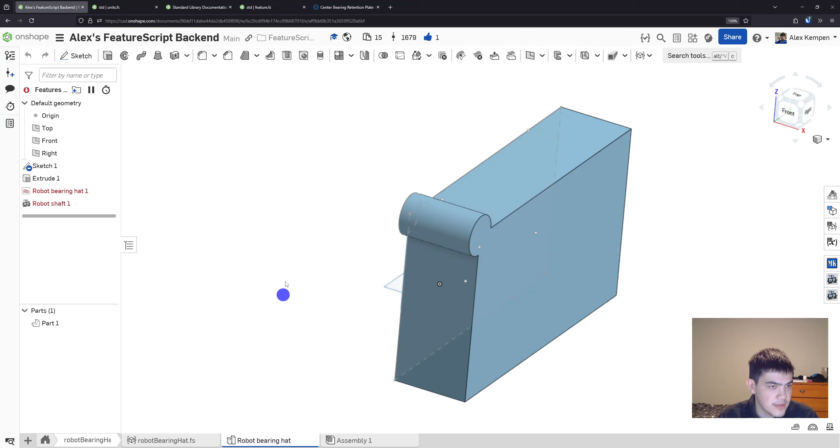So the first thing then is, in terms of selection style, external thread is probably a reasonable basis actually. Cylinder edges, yeah, so this is actually very similar. And I might actually steal that, to be honest. Let's go find that. Oops, wrong search location. External thread.

Okay, here's the feature, and here's their selection. So I'll go ahead and steal this.

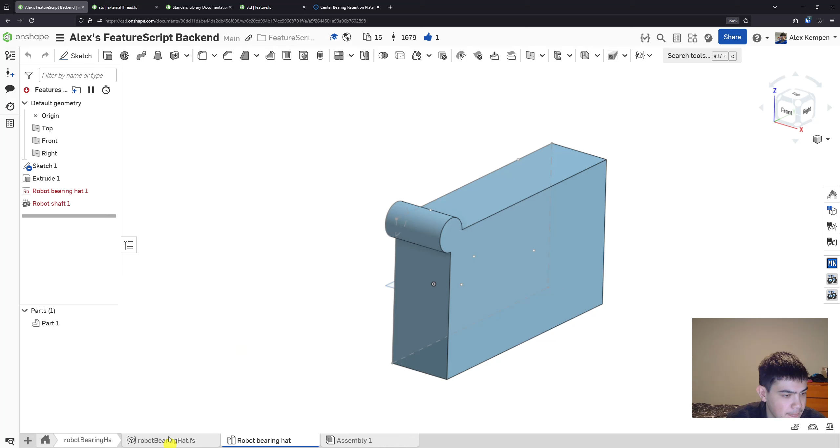So again, I'm just doing the same thing I did yesterday, although this time, going off what I was just talking about, I don't think it has to be unconfigurable. They have a bunch of things on here: edge topology, two-sided no, modifiable entity yes. Okay, this all seems reasonable to me.

So it's a circle, it's an arc. Oh, they also allow arcs. I don't want arcs on here, I think, because it shouldn't. I want a full bearing hole, and then I'm going to limit this to one.

Using this, if you're wondering what these parameters are, if you search FeatureScript documentation, you should end up on this page, and then the first link. There's a couple different things: there's tutorials you can look through, and then there's the standard library source, which is this document std. That's the source code, and it's pretty hard to parse if you're not pretty familiar with code in general.

But it can be useful for stealing parameters like I've been doing. Otherwise, you also have the standard library documentation, which is the documentation for all of the public functions, their parameters and return values and whatnot, which is pretty handy.

There's also this handy section, there's a bunch of other stuff in here for syntax. This is pretty verbose, so if you're not familiar with another programming language, it's not going to make a ton of sense, because it focuses a lot on the difference between FeatureScript and other languages.

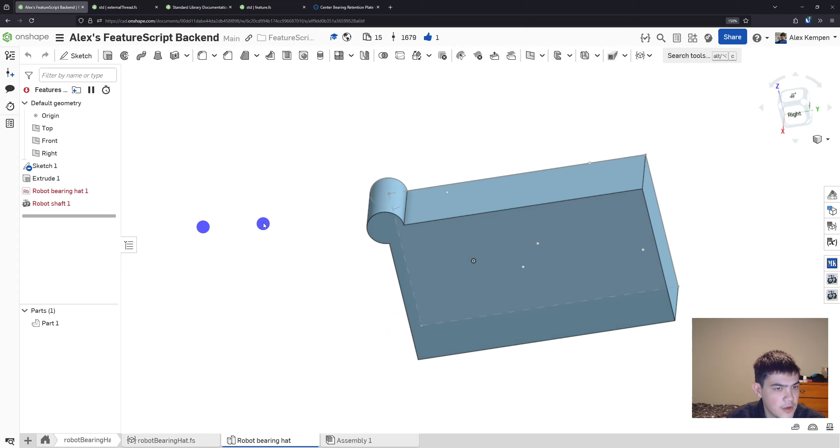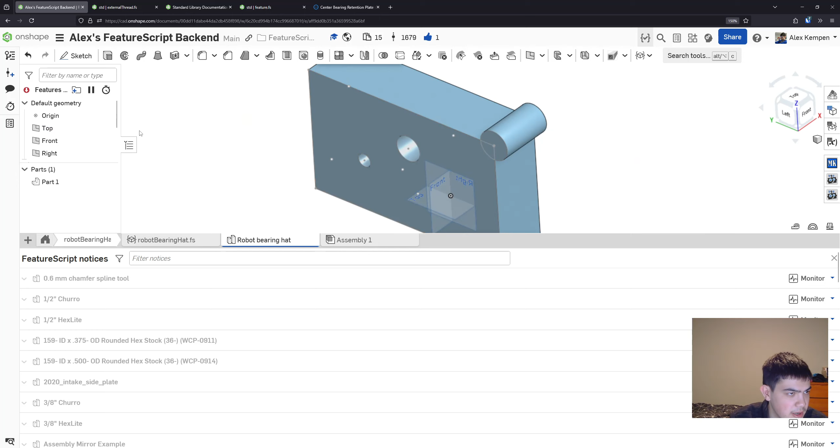So now I need a bearing hole, so we'll just make one real quick. Okay, yep. So now when I do my robot bearing hat feature, it asks me to select an edge to place my hat, and we can see here we are getting that part. I think it's going to be pretty hard to find one that doesn't have... oh, here's an easy way actually—if I just have a cylinder and extrude my entire sketch. So here's an example of a cylinder that I can select.

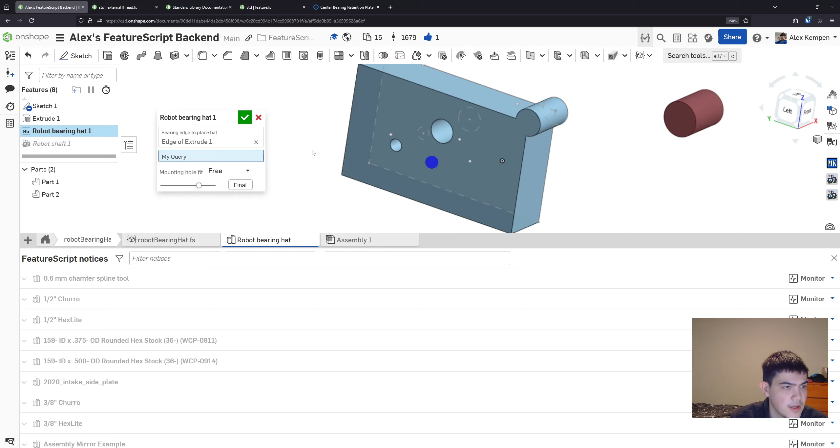So I'll probably want to do some querying to handle this case as well, so I'm not... because that's kind of goofy, of course, but you get the idea. Actually, I do wonder if there is an easy way to detect those. But yeah, so this works—we can see our debug was highlighting our entities correctly.

And I'm not going to worry—I guess you'll just have to take my word for it on the error handling, because this is a pretty niche error to find anyway, since we have so many filters on here: between circle, no sketches, and edge topology, no construction. I think that should handle most of our cases, but it's here if anyone ever goes crazy or something.

Okay, so we like that. So now we want to know if it's a hole face. And so when we were scrolling through here earlier, we did notice there were some functions for—you can check if it's like an OP hole. Of course, if they're extruding a circle, you're probably not going to have those parameters.

If I keep scrolling here, qAdjacent—so you could guarantee it's adjacent to a cylinder. That still wouldn't handle our big case though. Connected faces, loop edges, loop bounded faces—could try to use that to get the whole face. qHoleFaces, interesting—returns all faces of the hole. Let's give that a shot, actually.

Oh, that requires a face inside the hole, which we don't necessarily have, so that probably won't help. Although you could use Q adjacent, but then you have two faces you have to figure out. Yeah, and one of them you could require to be a cylinder, but that still doesn't solve your problem.

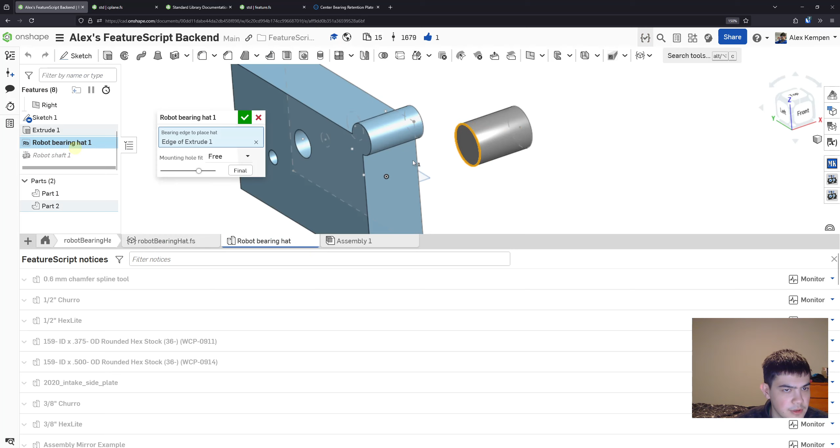Right, so I click my bearing and we scroll down and we are in fact seeing a circle, right? And so one thing that's important about this, right, circle.z-axis, oh, it has a coord system, coord system.z-axis, right?

So if we look at the documentation for a circle, we see it's a map. It has two key value pairs, one is a coord system and one is a radius. So we know how big it is, and we know where it is, and then we know the circle lies in the xy plane of this coordinate system, and the origin of its parameterization is the x-axis. Cool. So the thing I'm curious about is where is the z-axis on here, right?

So a coord system, of course, if you look at this, is just another map. And it has an origin, an x-axis, and a z-axis, right? And we can convert between a coord system and a plane pretty easily.

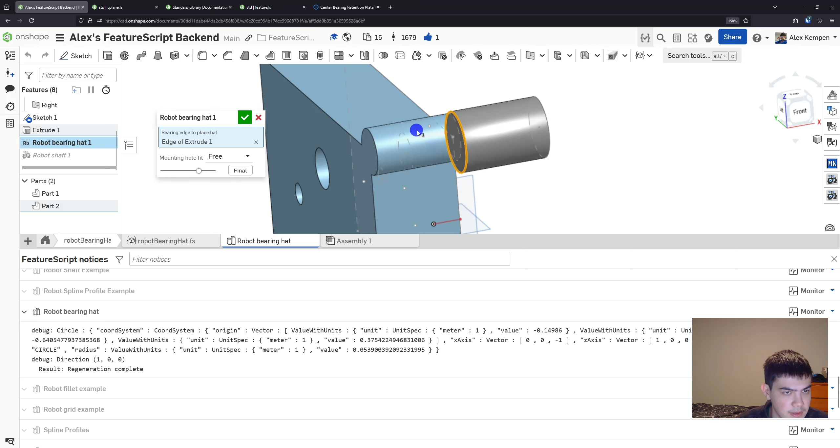So I'm just going to go ahead and print that out and see which way it's pointing. So you can see here, because it's just a vector, it's just on the origin, because it doesn't actually have a representation. It's just a direction. It doesn't actually, or vectors are unitless, so it's not actually from that point. You need a line or an axis to have that. But we can see, so here, this circle, it's facing that way.

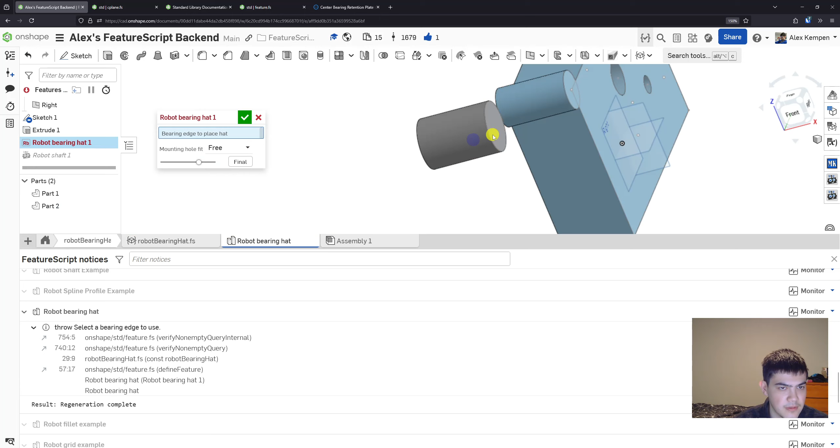And if we flip this around, it's still facing the same way. So that's good to know. And here it's like that, and there it's like that. So it's arbitrary for the direction of a hole. It looks like probably the direction of the extrude, or opposite, I guess.

Okay, so that's good to know, because that means we're not quite out of the woods yet, because we do need to know which direction the hole is in, so we can extrude the right way. We don't necessarily have to figure that out, we could just extrude both ways. But there are versions of this where, if you were to actually model the hat, you do want to know that direction, and so being able to figure it out would be helpful.

Although I do wonder, I don't think this is something that you're going to be able to figure out reliably. You could do the qAdjacent thing, get the whole face, get the planar face, or the bounding face, and then try to run evPlane on that to get the face, and figure out the direction from that. But the bearing hole isn't guaranteed to lie on a planar face. So evPlane could do something goofy.

And so generally when you get into heuristics territory, it's usually better not to try implementing those in the feature body. And if you think you can come up with a reasonably good approximation that should work most of the time, maybe that's something better for editing logic, where when a bearing hole is first selected, you take a best guess using some code to try and set the direction automatically.

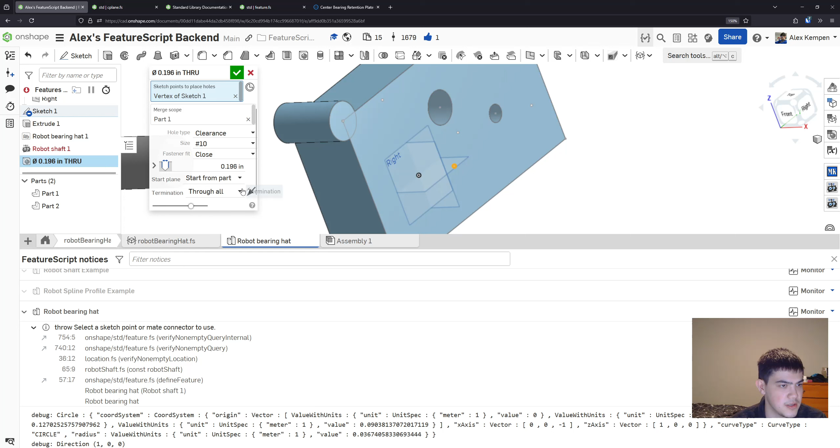But yeah, so we know from the standard library, this is a pretty common thing. For example, the hole feature, anytime you're adding a hole, it does its best to set the direction for you, but you can always change it yourself. So this sort of pattern of being able to change the direction, I think is probably the way to go here.

And actually, I think, so if we think about the rotation feature, actually not quite, I don't love that. If we think about positioning a mate connector, so if I wanted to position a mate connector over this hole, right?

Yeah, so it always knows the outer direction, which is interesting, actually.

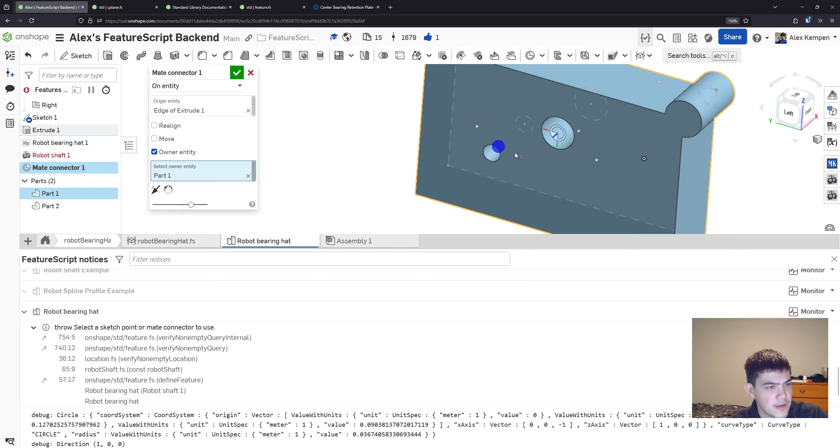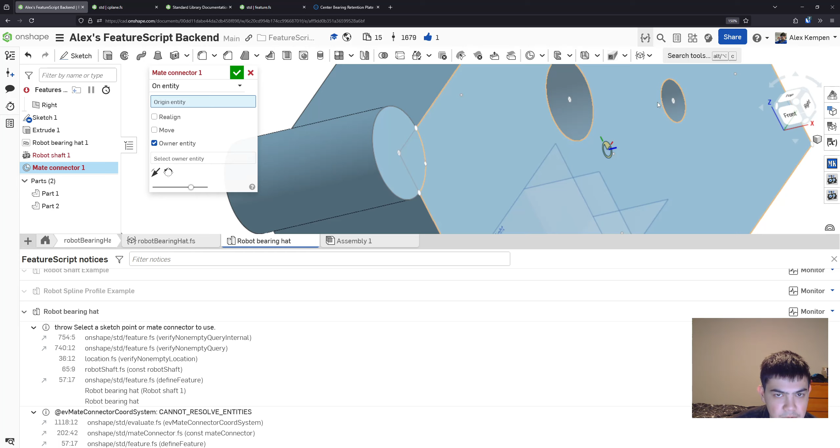But are there cases where that could be wrong? I guess so, right? Well, how does that work? Actually, now I'm curious. Because I know for mate connectors and assemblies, if you grab the hole, or the hole face, and you have the start, middle, and end, this is always one direction. We actually were seeing that earlier with the edge. But this edge here, on the face, is always facing outwards. I guess it's because it's implicitly from the outer face and not the hole face. But how does that work then? That's interesting. I guess one thing at a time, right?

So one thing I do like about this is you have your flip and you have your reorient, so you can turn it 90 and rotate it around. So this UI right here I actually do like a lot. So I'm probably going to steal that.

So let's go open that up. Mate connector. Yep. So this is the mate connector feature.

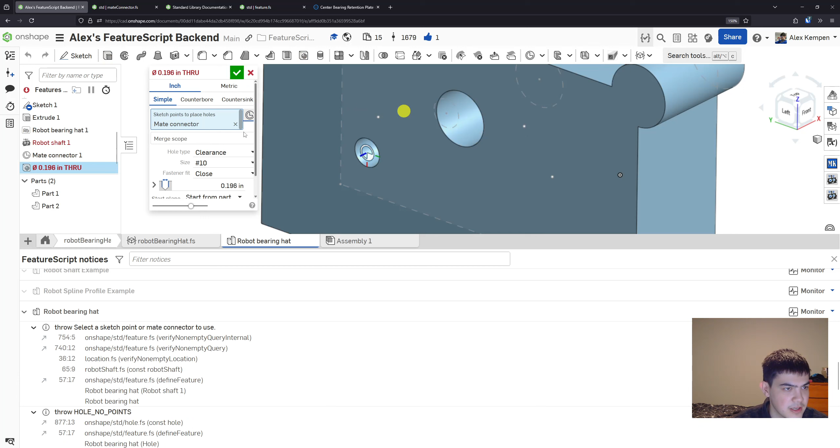And I believe this is actually also used in assemblies, right? So there's the mate connector feature as well. But you also get a variant of this when you click this button, you select a mate connector, right? And when you click this to edit, this is also the mate connector feature brought in line. And same thing in the assembly. Although the assembly doesn't quite run FeatureScript, so I'm not actually 100% sure how that works. But the parameter names and things are all the same underneath the hood. So yeah. Anyway.

Yep, so if we look at the code, right, we see origin type, origin entity, right? There's some hidden parameters in here for inference type. That might be the secret to how they're able to get the direction, actually. Part origin point centroid. Respect to an entity. Face normal. Along the normal of the plane which the edge lies on, or the center of a sphere with the world coordinate system. Aha, so this is probably how they're doing it, right? Z-axis along the normal of the plane which the edge lies on, right? So that's the face version, right?

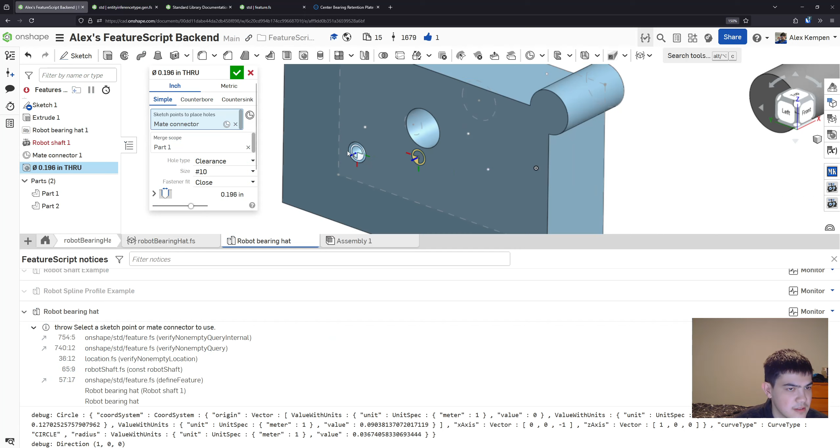Anyway, that's beyond the scope of what we're doing right now. But that is an inference type, so I think that is something that's kind of implied or calculated via editing logic rather than something that is necessarily 100% reliable. Inference type. Now I'm curious. We are falling down a rabbit hole, which I accept.

It does take an inference type. Where is this used though? Oh, is it just passed to opMateConnector? Yeah. Oh, no. opMateConnector. Transform result if necessary. All parts, lots of query logic, lots of thinking, lots of finding owner bodies. That returns owner bodies. Let's see, this function ends here. It might just be an internal thing. I'm actually not sure. There might be some internal wrapper shenanigans going on with this, or maybe I'm just missing it. I'm surprised it's not... Oh, no, here.

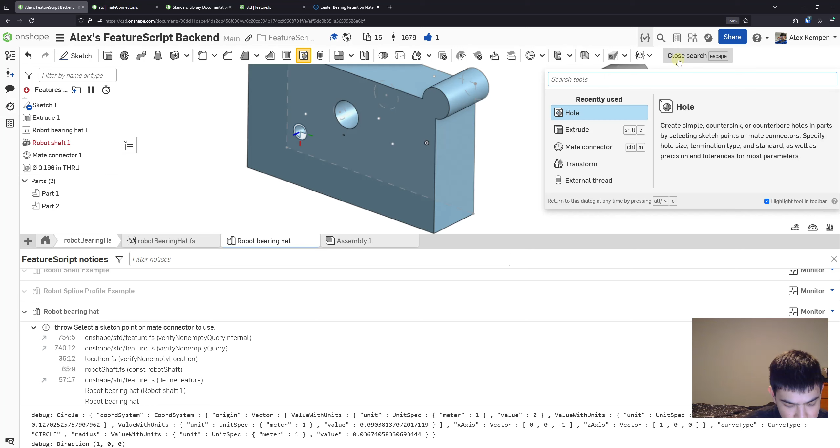The part I want is here. Wait, is that what I want? I think I want these guys? Wait, hold on. Sorry, getting sidetracked again. Mate connector. That's there. Okay. Mate connector. I want flip primary axis, reorient secondary axis. Flip. Okay, yep. So these guys. So we'll do that. So just grab those two guys here and slap them down here probably, right? And then we need a mate connector axis type. Let's see, mate connector axis type. Aha, yep. So here I can steal this import.

So if I copy paste this, and then, Windows V? Nope, wrong Windows key. Windows V, yep. Didn't copy. Oh, that's so sad. I swear, what is it copying? Okay. I copy paste, nope, okay, it didn't work.

Mate connector axis type gen. Type.gen.fs, right? And because I need the enum, I'm gonna have to export it because enums have to be exported. But that should give me that. And we can see it's no longer throwing the error, so it's happy, which we like. So cool, we're happy with that.

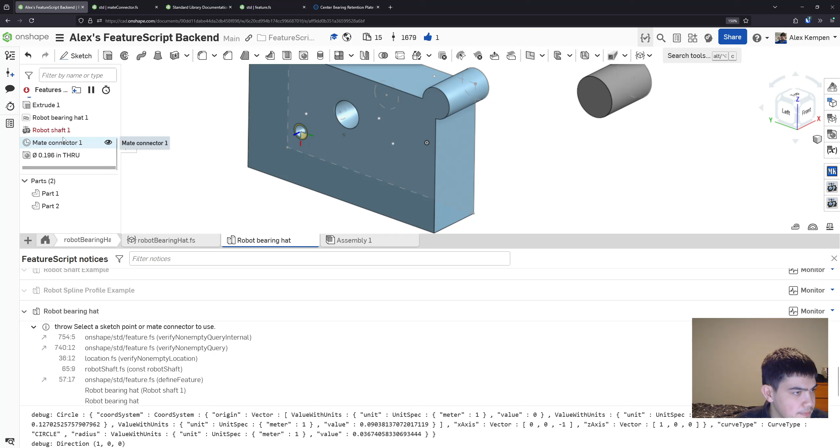Okay, so we have our flip and we have our reorient secondary axis, right? And then we can also specify rotation angle, which is good. And it defaults to 0, which we like as well, right? Cool, so we're happy with that. I guess rotation should probably be like revolve, kind of. Revolve angle, maybe like transform.

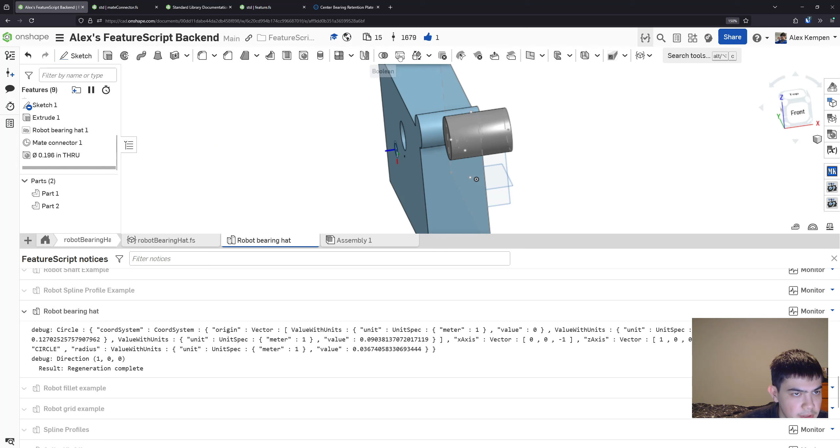Angle, and then you have a flip on it. That makes sense. Okay, so I actually probably want to do something like this. And what did that say? Rotation angle? That seems reasonable. Actually, probably just angle is fine, I think. So let's go steal, what was that from? Transform? Let's go steal that. Right.

And you could, of course, make your own UI. You don't have to always. I think it's actually transform copy is the actual feature. Transform is like the geometrical transforms you use in Onshape, like the math, a 4x4 matrix of numbers that defines an arbitrary transform in 3D coordinate space. So transform copy is the actual feature because it transforms and copies, and just because transform was obviously taken.

Because I think for programmers, the math version is a little bit more important than the feature version. Obviously to users you don't care about the math, but to us programmers it's near and dear to our hearts. So, okay, here's the UI, right? So we see the different modes, mate connector, rotation, here we go. So here's the angle, and here's the opposite direction. This is actually just the bog standard opposite direction Boolean they use everywhere. So I'll grab that.

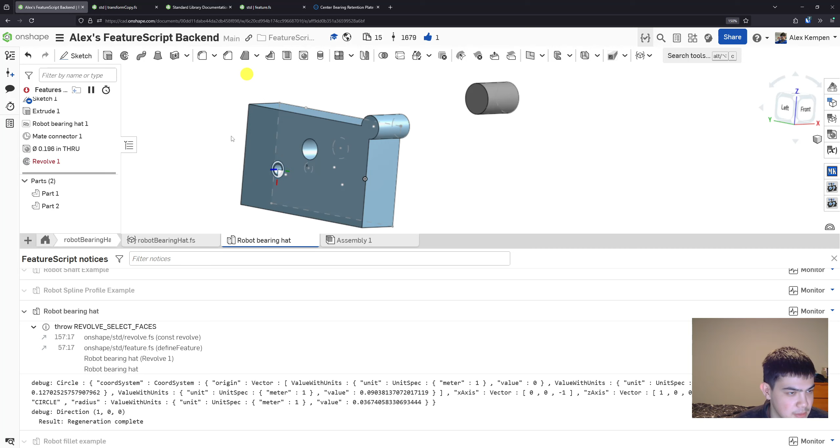And the reason why, it sounds a little counterintuitive, but that's for features like revolve, where a 0-degree revolve doesn't make sense. It's actually not allowed. Oh, it actually is allowed. That's funny. But it doesn't make as much sense as it might otherwise. So instead, there's a 0 default specifically. But yeah, so that's our angle, and I'll probably name it rotation, I think rotation makes sense. Okay, and that's flip primary, so it doesn't conflict with opposite direction, which is good. So now our UI looks like this. Cool.

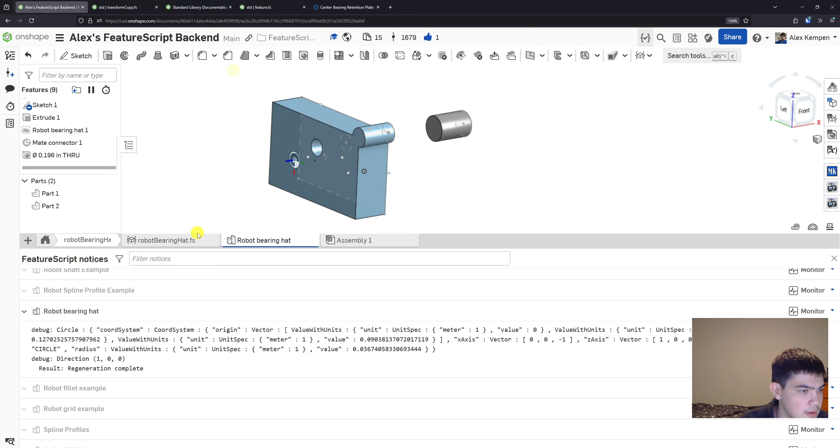And then, do I want an angle reference? Yes. So I'm also going to add an angle reference query, right? And this is not really something you see in Onshape, so I'm going to have to home grow it. Basically the idea is you can select an angle reference to point towards, and then you can also set the angle on top of that. So very fancy, but I think that's helpful. There's certain edge cases where you want to align with something somewhat arbitrarily, and being able to do that is helpful.

And then for this, I know from experience there's actually some query utils. There's a query enum, I'm forgetting what it's called. Extract direction, I know, is the version. Yeah, so there's this enum here, query filter compound, right? These just compose some helpful ones. And here I think the one most helpful to us is allows direction. Although, let's see, the line is good, that makes sense. Plane also kind of makes sense, because you can use the plane normal. Circle and arc and cylinder do define directions, but it's a little finicky. I can't imagine anybody trying to use that with this.

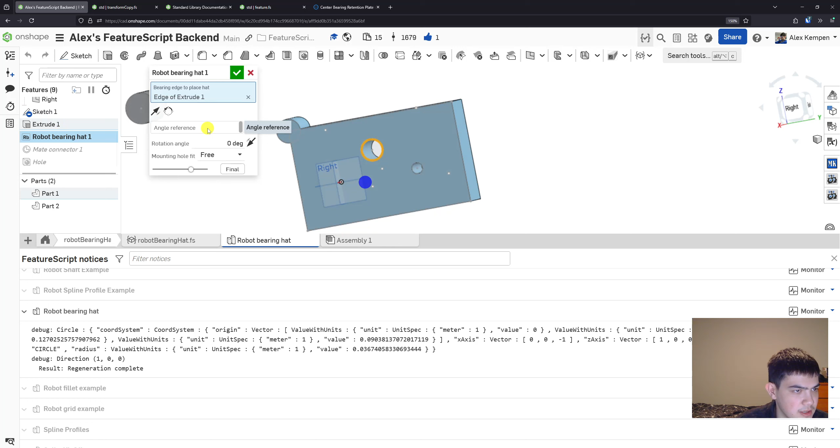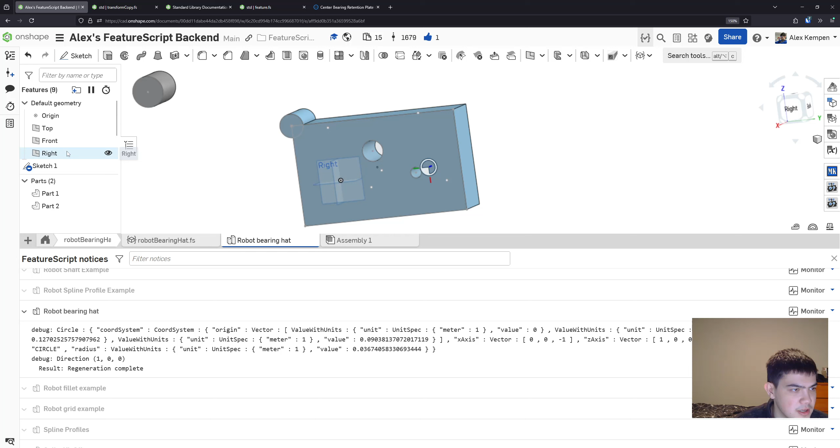Or a mate connector. I don't love the mate connector, actually. So I'm just going to do entity type dot vertex. And do I want that to be an actual vertex? Because vertex allows a lot of things, like I could require it to be modifiable or something, but it just needs to be a 3D point. It really doesn't matter where. So if you want to select a model corner, that's fine. You could orient towards that. So I'm not going to worry about that. And then the line, you just have a direction, so that makes sense.

Okay, cool. So let's do some processing of that now. So I'll start with the angle reference. So first we want to know if it's a vertex or a point, right? Angle reference. Okay, so first, if it's not empty, right? Because if there's nothing, then there's nothing to do here. We can just move on with our lives. But if there is something here, we need to do something. And so here, let's do is point equals is query empty.

And so here I'm going to use qEntityFilter, EntityType.VERTEX, because that's the same filter as above. So this will filter out everything that isn't a vertex. So if this query is not empty, then we know it is a point. So again, after filtering out everything that's not a vertex, if the query is for a vertex, then our query will not be empty, so therefore it is a point. It's a little confusing, but basically whatever query you have in here, if you have this exclamation mark is query empty, this will check that it is of that type.

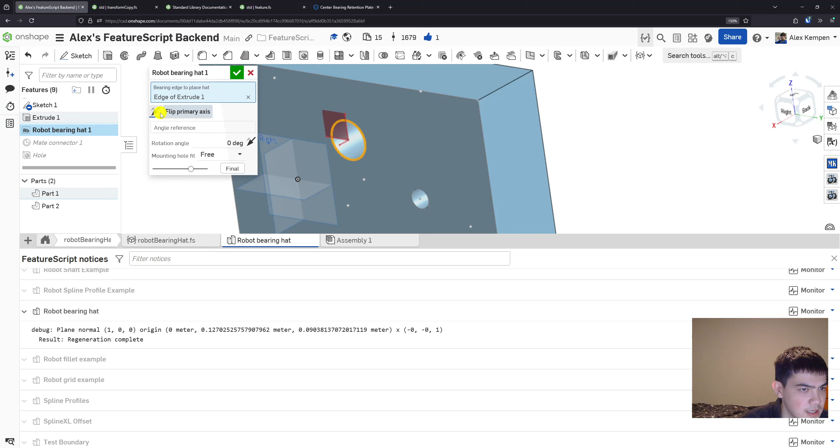Yeah, so we'll debug that and we'll see what we got. So if we do this, you can see I can give it a flip, and I can also give it a rotate. So that does what we want. So we're very happy with that.

The other thing to do is the angle, right? So we'll do const angle equals definition.angle times definition.oppositeDirection question mark -1 colon 1. So exact same thing again, where we take our angle reference, or I guess it's rotation. I'm going to rename it to angle. Angle. Yeah, that seems fine.

Yeah, you take your angle and then you multiply it, and then we will simply apply our transformation, right? And so here I know you can do rotation around. So this makes a transform, right? So this is where you get into some fun units, basically. So I need a line, which I can construct from a plane directly, actually. And then, can I? Pretty sure I could. Is there not an overload?

I guess there's not. So I know, okay, so the first thing I want is rotation around, right? And if you just Control F rotation in here and click through, you'll pretty quickly find this function. So we see it takes a line and an angle. It's rotation around the given line, so we know we need a line. So if I click line, I can see there's a constructor and it takes an origin and a direction.

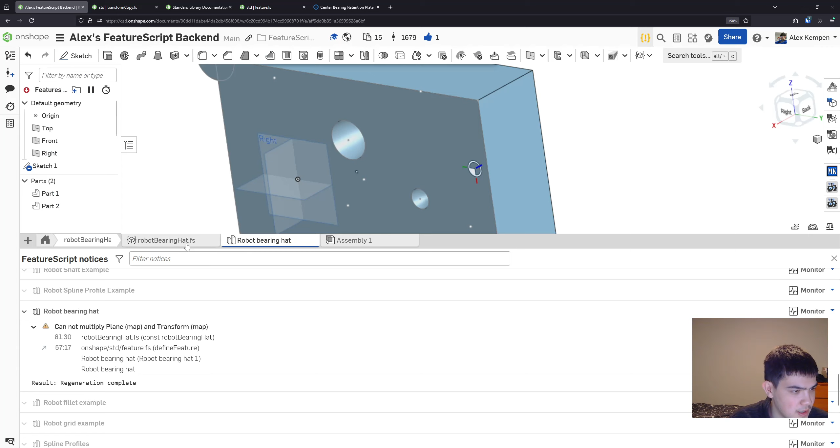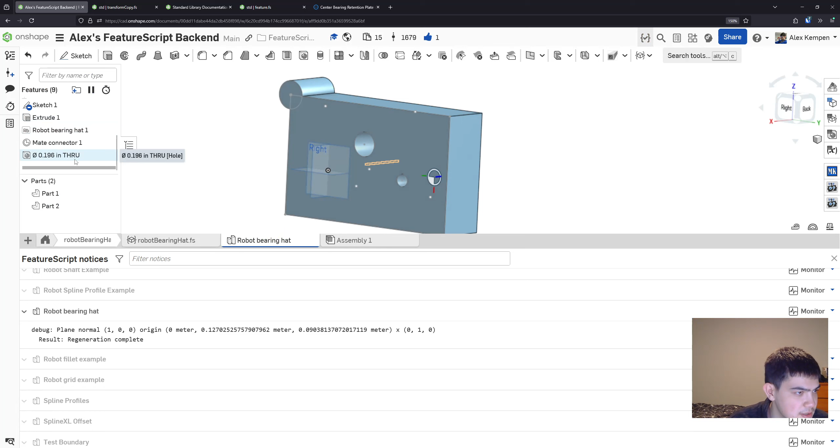Nope, I cannot. It says I won't. Let's try the other way around. Aha, yeah. And then if I debug my plane again, I saw there my error was cannot multiply it, so I just flipped the order of operations. And so now if I enter an angle ref, we can see it does in fact rotate, which is cool. And I can also give it a flip and flip the angle as well. So quite a bit of control there, actually.

And then we just want to do our angle reference now, right? And angle reference would probably apply before the angle. So we put the cart a little bit ahead of the horse as well. But yeah, so here's our plane, here's our angle ref. So now we'll do this. If we have a point, the first thing we're going to want to do is project that point.

Project. And project works in all sorts of things. I know in this case there is an overload that supports planes. You can project lines onto planes, you can project points onto lines, and most importantly for us, you can project points onto planes as well. So we'll project that. Actually, I'll just do it like this. No, I can't. Okay. Yeah, so I'll project it.

And then we want to verify the error case for this, which is if the point is the center of our vertex, there is no angle reference because they're the same point. There's no angle there, which is not good. So the way we will handle that is we will check for it. So you might be tempted to do something like this: equals plane dot origin, then throw your error.

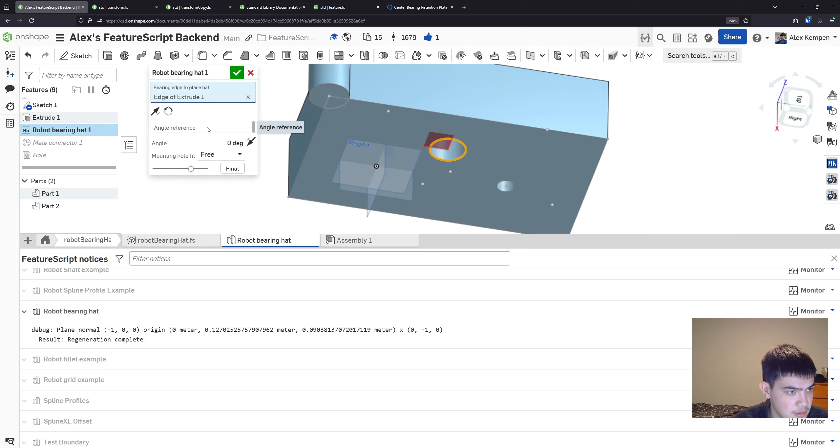So we can go check that. So we got here. Okay, we'll turn off the angle reference because we don't want them stacking. So all we're doing is printing the x property.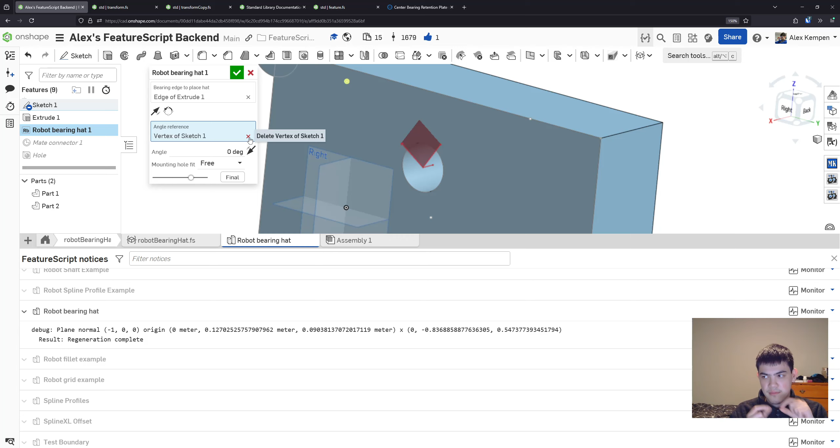A plane is defined by an origin, a normal, and an x. This is like multivariable calculus where they talk about planes and things. If you set the x direction of the plane, the point in the normal, we want the point to be the center of the hole, of course, and we want the normal to be the direction. It's just what makes the most geometrical sense.

So then it makes sense, if you just set the x direction, you will point at that angle reference. If they want like 90 degrees from that, they can do that, because the angle reference does have to come first. But you can logically orient it like that. And so our flip wasn't applying there because there's no point in rotating it if you've already set it, which makes sense.

So I'm going to copy paste this down here. There is kind of a specific order that you have to apply the transforms in, which is fun. And these work on the plane.

Let's just do this: our plane equals plane circle.coordSystem. We'll switch to a plane right here. And then we won't have this. I'll do my plane.x, and then I'll do my plane.normal. Those are just the exact equivalents for coordinate systems versus x-axis. I won't rename that because I'm lazy. And then this will just be plane.origin.

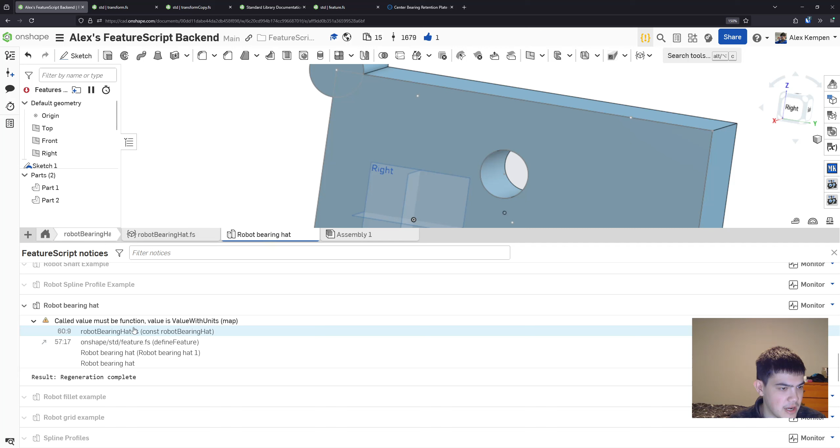So is that right? Should be right. Let's see here. And the fun thing is, if it does happen, we can see Onshape is handling it reasonably well right now. But if I come down here, it's going to say called value must be function, value with units map, right?

Because it's trying to call, because the variable has overwritten the function. You are essentially doing, if this was just my var, you're essentially trying to call my var like a function. And we can see here my var is very clearly not a function, it's 2 times inches. So this is obviously an invalid call, and that's what this is saying. If you're going to call it, it has to be a function because that's the only thing you can call. You can't call a value with units or whatever value.

But the thing is, this error doesn't make it exactly clear what's happening, right? Because you're like, what? Value with units? I'm not trying to call value with units, I'm trying to call a function. What's happening? It's because you've overwritten it.

So here, for example, originally I had this variable named plane, which is the same name as the function. But it doesn't matter as long as it's coming after, because I wasn't using the plane constructor anymore, so I didn't need it. So it doesn't matter if it's shadowed. But since it is being used again down here, it's already in use, so I'm just going to have to rename this to something else, so I'm not overwriting it, so I still have access to that function.

So yeah, a fun little bit of programming lore. It's always a fun issue to encounter.

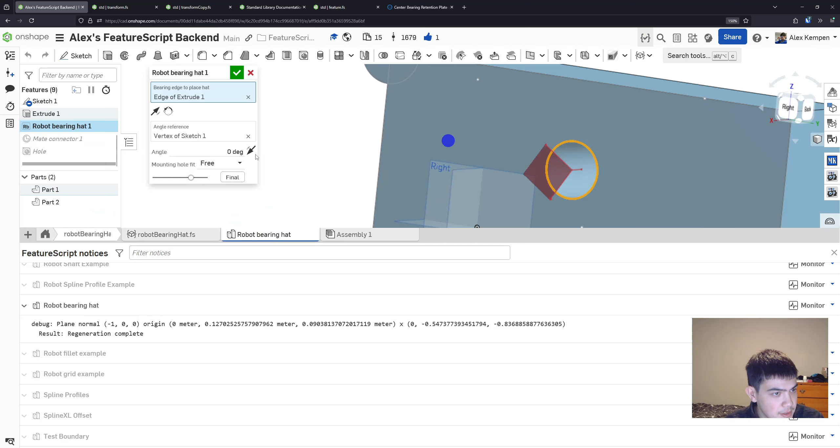So I can set my angle reference, it'll point towards whatever point I specify. Even if my point is not on my point, it'll work. And then if I select my hole, I get an error. You can see the error handling we did. We can see the vertex and the edge are both highlighted in red in the query, and then we have our error message. We can see both parameters are red because they both contribute to the error. Although realistically, the angle reference is probably the more problematic point of the two, but it is them working together, so I think it kind of makes sense to highlight them both.

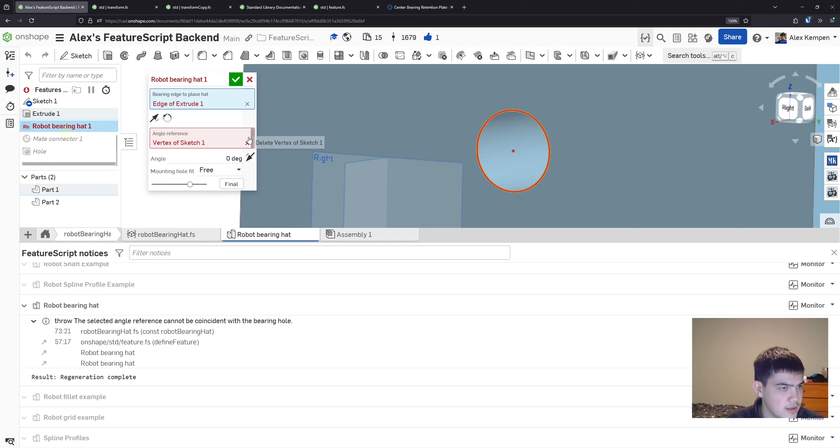So there's that. And then let's verify that this all works correctly. So if this is like this, it's angled. I can still flip it. Yep, and I can spin it around like that. And I can also enter an angle reference. And I can still spin it around, and I can flip it, and I can flip my angle reference too. Perfect, so we're very happy with that.

And then we'll also do the line version as well. So this one gives us a direction, so then we'll do the same thing. And our direction is already a plane, so we can just do circle plane equals direction. And the only thing we have to check here is we need our direction to be...

If the direction is not in our plane, we have a problem. So I'll probably, you could try projecting it, but it's kind of annoying. There's not really a great way to do it because project doesn't work with unitless direction vectors. So instead what I'm probably going to do is, I'm probably just going to require that it's in the circle, so I think we can use

Evaluate intersection. So you can do a line plane intersection. No. Is parallel? Yeah, so we can check if they're parallel. Few parallel planes. Those are queries.

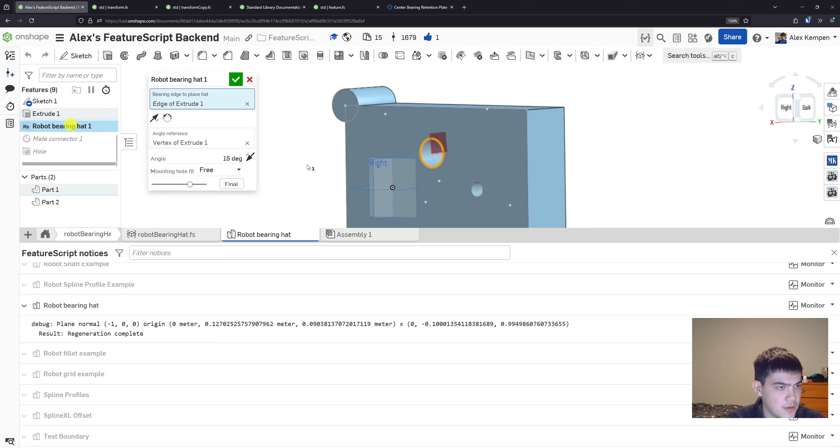So we'll copy paste that, and we'll say the selected angle reference must be perpendicular to the bearing hole. Okay, cool. So here, if I select an angle reference like this, it wants a line. Yeah, that's right, so here it needs to be a line, so I'll just do this.

Because right now it's just a unitless vector, so it's just like an arbitrary direction. So to give it a direction, I will construct it into a line. Or wait, no, I need a vector. Can I just multiply by meter then? Is that right? No, multiply by meter is wrong. I think I do.

Wait. Oh, yeah, sorry, I have to do circle plane. Okay, so I have to make it a vector, so I have to do this. Times meter is just arbitrary - meter is 1 in Onshape because lengths are universal. So this is a fun little bit of vector math, right?

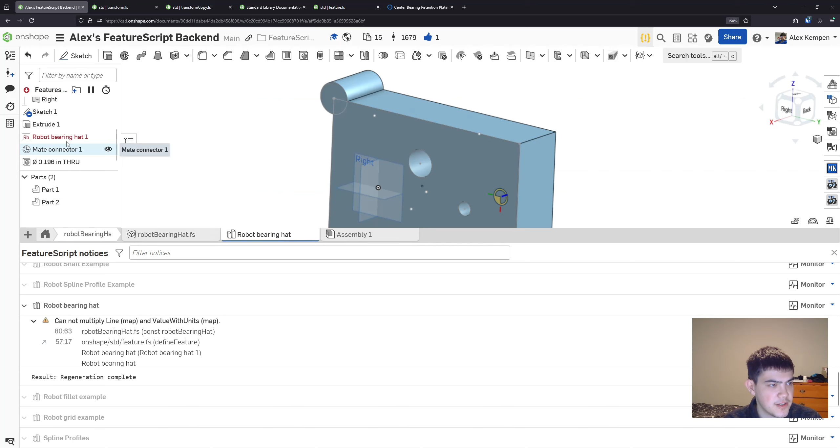Do that just to make it clearer. Okay. So if we debug our - right? So basically the problem is a vector doesn't have, or a direction doesn't have an origin, right? And so, what? Oh, this is a line.

Wait, it's a line? Oh, okay, I think I wanted extract direction. Yeah, okay, and then, oh, this does give a - okay, that's interesting. Angle ref, okay, so that does give a vector actually, so I don't actually have to do that. I was thinking I had a 3D direction, which is not what I want at all, but I have a vector, so we're okay. So I got confused by my units there.

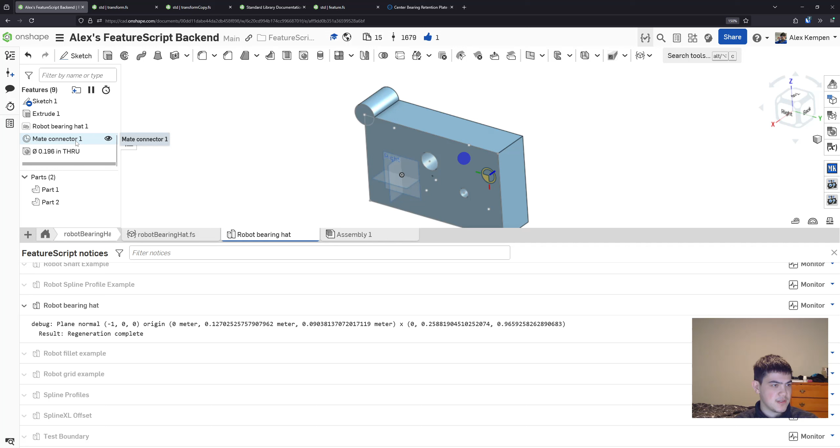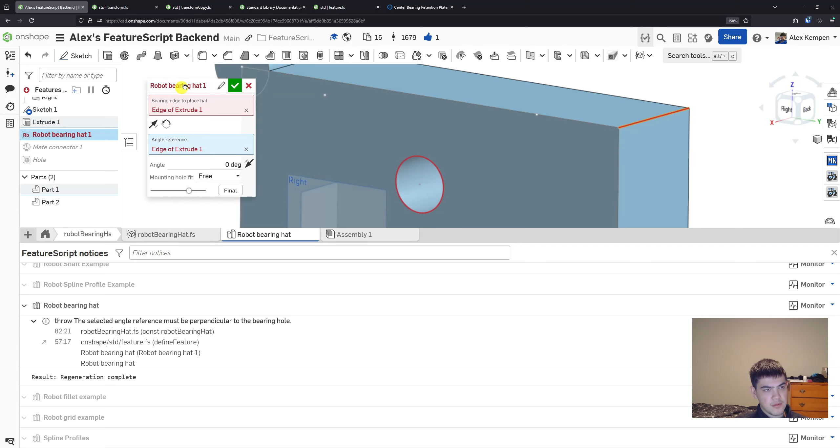And I was using evAxis, which would give me a physical line in space, like an origin and the line, which is handy but not really what I need right now. So if I set my angle reference, it's just giving me that vector, and because it's a vector, as long as it's perpendicular, it's fine. So if we do something like this, it's not perpendicular and we have a problem, and it'll complain, which is good.

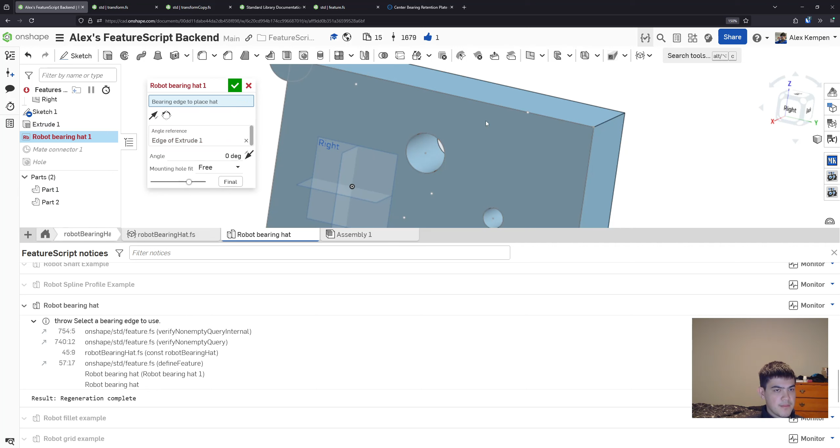Must be perpendicular - I guess it must be parallel technically from the user's perspective, right? Because it should be parallel to the plane. Yeah, okay, ta-da. Great, so yep, so I can do my angle reference like that.

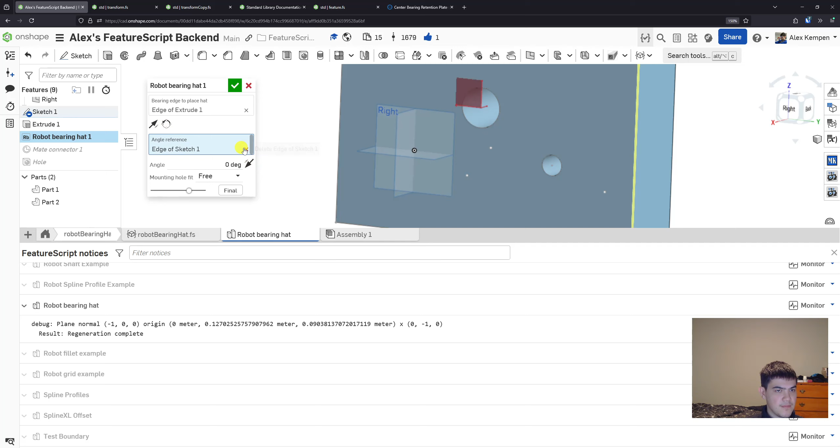Oh, that's the bearing edge. Yeah, so I can change this, and I can also set it like - I guess it just is facing that way like that, and I can flip it, and that all works. So if it was like this, and I select that - oh, I guess it's the same. Wait, really? Oh, okay, yeah, so this works basically. Yeah, it's the default, and that's the same.

Okay, cool. All right, so we're very happy with that. So that's our coordinate system figured out. So we like that. Yeah, so now we have our circle plane, so now we have to actually cut some bearing holes, right?

So this is where the code we wrote yesterday comes in handy again, right? So I'm gonna copy paste that. We just have one plane to operate on today, because we made that decision. I'll comment that - I'll call these my tools, just so that way I can query everything really easily. Circle plane, right, sketch same, and then we need our mounting hole radius code again.

Okay, we'll just do this, do that, yep. I'm not going to make the center hole because we're assuming the user has already cut that for us. And then, yeah, so by carefully manipulating our plane, we've saved ourselves from having to do a bunch of math, because you can see we've been manipulating a plane that was always centered in that coordinate system, right? And so that x direction is always the way we want it, so we can just draw our vectors relative to that.

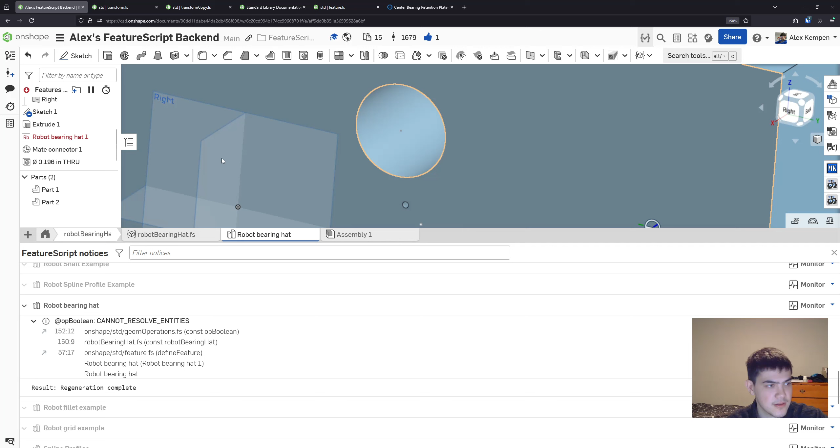So, okay. Ta-da! And then, yeah, so our sketch was too big, right? So if I make this actually a reasonable size bearing hole, still no. Interesting. Okay. Oh yeah, definition.scope. But if we're having an issue with cannot resolve entities, the easiest thing to do is to start debugging your inputs. So there it was definition.scope. You debug that, you see undefined in your console, you realize, oh, there is no definition.scope. I wonder why that is, right?

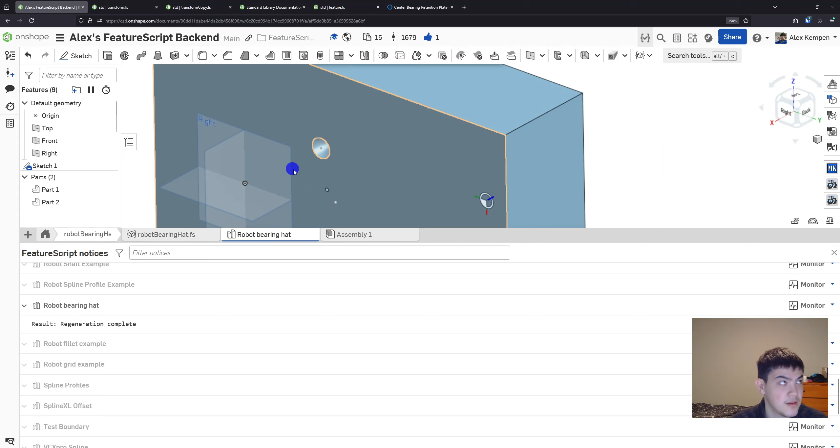You look up here, you realize there's no scope parameter, and you realize that's because you're getting the scope somewhere else. So definition.scope is wrong. And then if there is something there and it looks correct, then you debug the tools and make sure that's correct as well. And then if everything's right, then you write an Onshape support ticket. No, don't do that. Then you think a little bit harder about your life, I guess. But usually there will be something wrong with your input in some way.

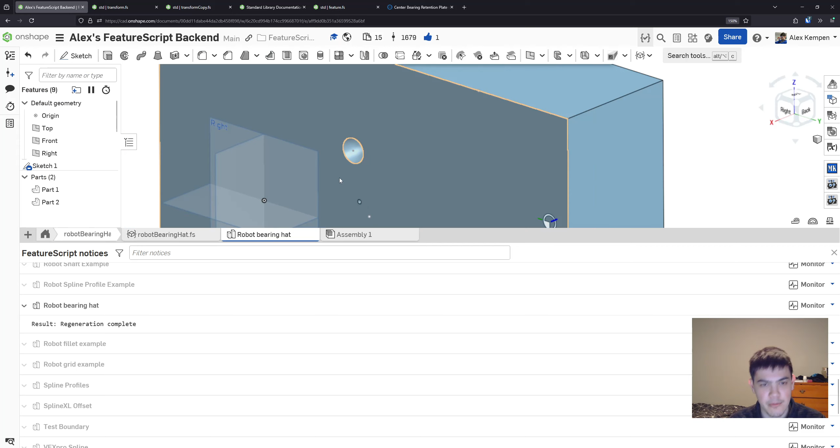If you debug both and they both look right, then maybe I would try to do a simplified example, or verify that the feature works the way you expect it to with a trivial example, like I'm just going to remove a simple box from everything, right? Make sure that works. If that works, then you can kind of work your way up, basic programming debugging, or you can just be like me and just spot the problem immediately. Maybe don't bank on that.

Okay, so we've extruded, and we've booleaned. Okay, cool. So I have the direction the wrong way. And I'm surprised the boolean feature isn't actually failing. That is very interesting. Okay, so I'm going to do something a little bit fancy here. I'm going to use a special feature. What is this? Process foreign data info? What? What is that?

Foreign? Okay. Huh. Not sure what that's about.

Okay, so I'm going to use this fancy function called process new body if needed, right? So what this is... dot remove, right? And then my Boolean scope is my scope. And I do not have a default scope on this guy, so I won't do that. So what this feature does is, actually I could do that. No, I won't, because we're getting the scope. Yeah, so I don't need that.

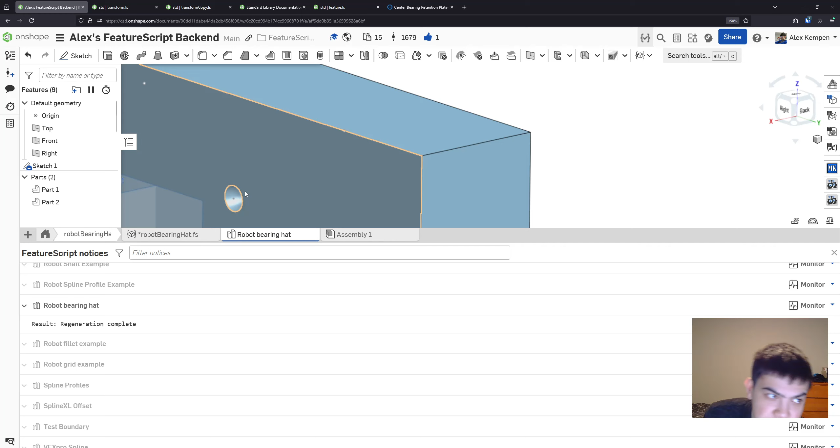So this is for adding a Boolean step to features, right? And so you might say, well, what's a Boolean step? That's simply the idea that a feature will create something, and then you will have the option to Boolean it to something afterwards. So extrude, for example. You can just do a new extrude, but you can also Boolean it onto something, Boolean subtract, Boolean intersect after. Revolve has a Boolean step, right?

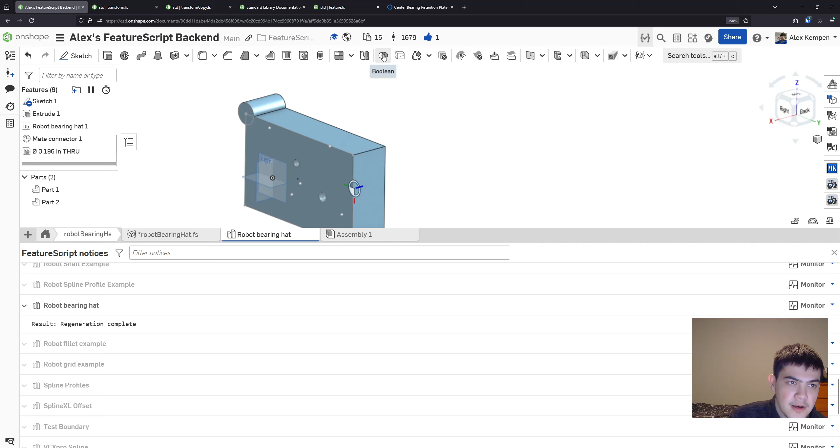You can add, remove, intersect. Other features, mirror has a Boolean step, add, remove, intersect. Pattern has a Boolean step, add, remove, intersect. So it's just that set of options. Anytime you have a Boolean step, you have your new, add, remove, intersect, and then you also have your merge scope as a part of that. And that pattern is so common that it's actually defined in 2 parameters.

So there's a Boolean step type predicate in the Onshape standard library that you just have to export with the correct import, which is defined. The documentation tells you what to do. If you look at it, yeah, you need this import. You just specify whatever version you have. It is just tool.fs. Okay.

So you add the Boolean step type predicate, which is the new, add, remove Boolean, and then you add the Boolean step scope, which is the default scope, and that's your merge with all, and merge scope parameters. And the last part is this process new body if needed, which interfaces with those above mentioned parameters and does the actual Boolean. It just grabs everything that was created by this ID and Booleans it with whatever your scope is.

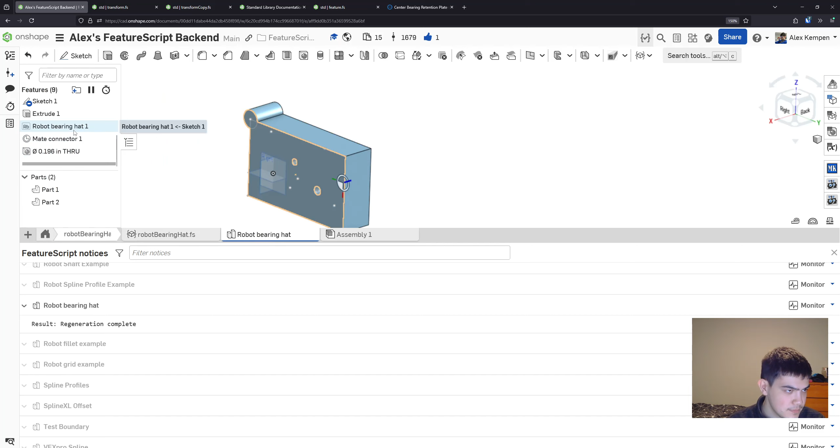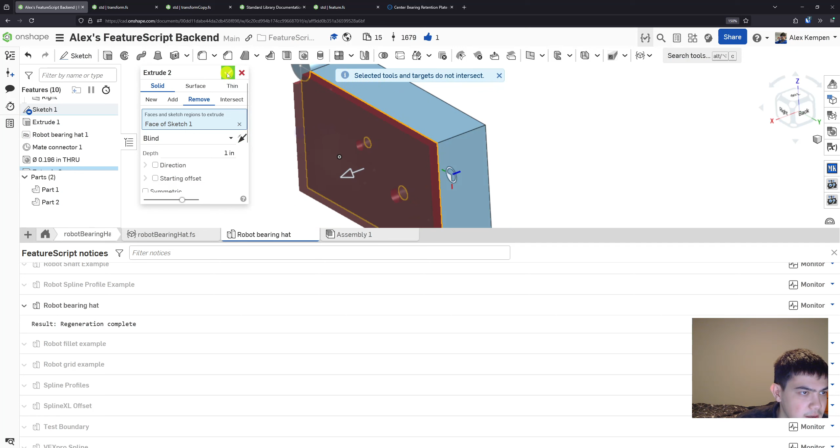And then the cool thing, it gives you this warning, which is actually a little bit wrong. Well, I guess this is technically a little bit wrong. Because a Boolean remove, for example, is very forgiving actually. You get the warning, you get the error highlighting, but it's not actually an error. This is an okay feature, even though it's not doing anything, which I don't like, because a robot bearing hat feature that's not cutting any holes should be an error. So instead, I guess I'll just roll my own.

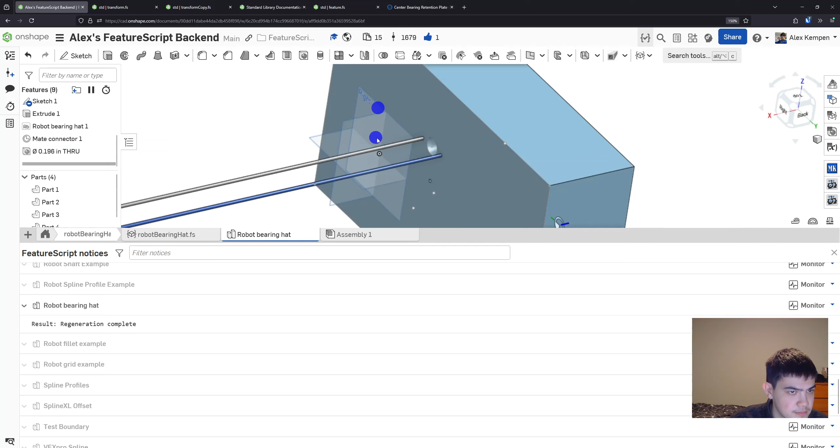Targets. Yeah, so what I'm going to do is wrap this in a try catch. I'm not going to worry about the error. Does this really not? Feature's not creating anything. What the? Really? Yeah, it's doing that. There's no Boolean. I thought the Boolean would fail in this case. I really did. What is process new body? Okay, let's go look at the source code. I'm surprised my Boolean is not throwing an error in that case.

Oh, maybe it's throwing like a rolled-up info status or something. This might be a process subfeature status moment. Oh, I guess we could also do a process feature status. Oh yeah, okay, it's coming back to me. So basically, in a case like this, our Boolean is failing, but it's not an error per se. It's just a warning. And by default, that doesn't get propagated up the tree. It just gets tied to this identity, but because this identity is not the feature ID, it doesn't fail.

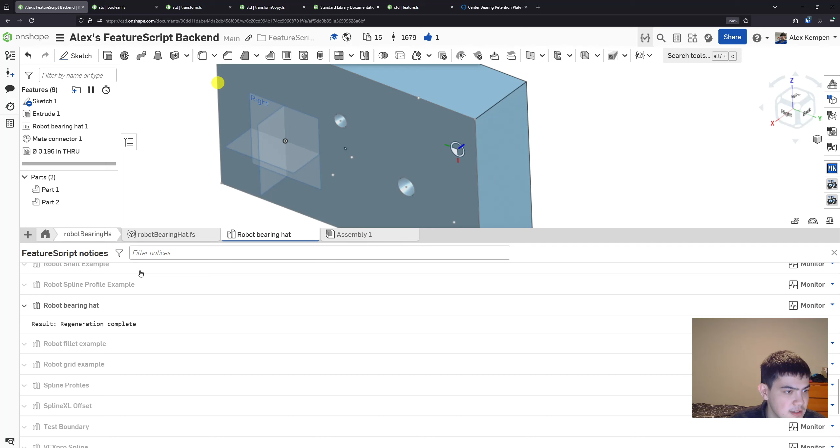And so we could see the error directly if we pass in the top level ID. So this is that selected tools and targets do not intersect. That actually comes from the opBoolean itself, but it gets hidden because when you give it a sub ID, info statuses like that do not propagate up the tree by default, so it just doesn't get shown. So the feature is just happy completely. You could just give it the top level ID, but you can only do that once because each ID can only be used once. So generally you don't want to do that unless you're wrapping around opBoolean completely.

So instead, what we can do is use a function called process subfeature status, and what this does is it will roll up those other statuses. So if we just do this.

Once it loads. Okay, Onshape is struggling right now. Oh, Onshape is really struggling. Or my internet is down. I hope that's not the case. That would be unfortunate. Give it a refresh. Okay, it's struggling. Struggle again. Okay. Hello?

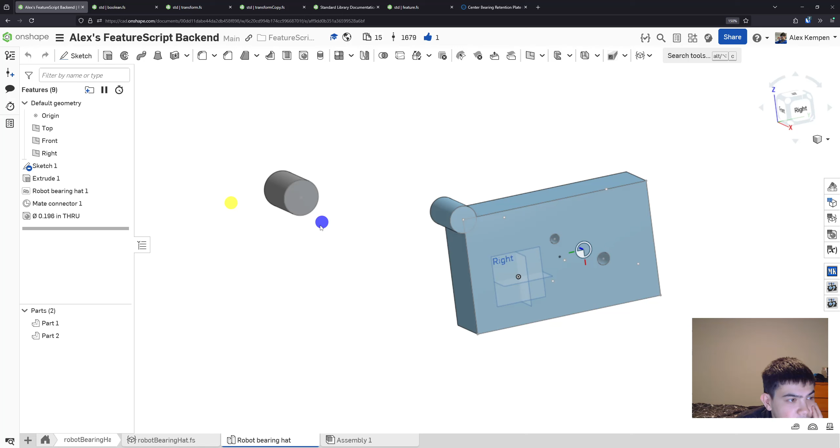Okay, we're back. Yay. Alright, yeah, so we can see the error display propagating, but there is no actual error display. Some features will actually highlight the bodies for you. Boolean does not, which is a little sad. Image data, yeah. CAD import data. Okay, I'm just scrolling through the standard libraries. It's been a while since I've done this, and it's always fun seeing the new things that they've added.

Like the ability to programmatically hide parameters at runtime, it's pretty neat. Although, I'm trying to imagine cases where that would be actually helpful. Oh, I guess you could set whatever conditions you want. Oh, that actually would be really useful. It's too bad it only works with array parameters. It's kind of goofy. Okay, anyway, there's all the Onshape features, cut list.

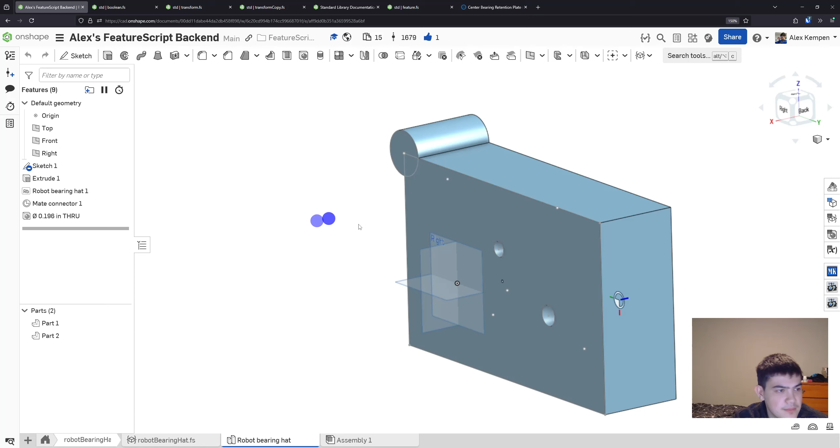I wonder if they've added any new UI hints. Display short, show label. Always use dependencies, what? Whether the value specified is positive or negative. Can be tolerant, focus on visible. Oh, that's handy. Okay, anyway, display current value only. Alright, let's see what hole does for error handling, I suppose.

That is, nope. Did they release another version? They did, today, wow. Fascinating. Okay. Did they finally fix their search? Oh, it looks like they did. That's so nice. For the longest time, Onshape's search would just count the total, and it wouldn't filter. Oh, I guess not really. This is still not great. Come on, Onshape. You type it in exactly and it doesn't propagate to the top. It's not ideal. Okay, so let's see here.

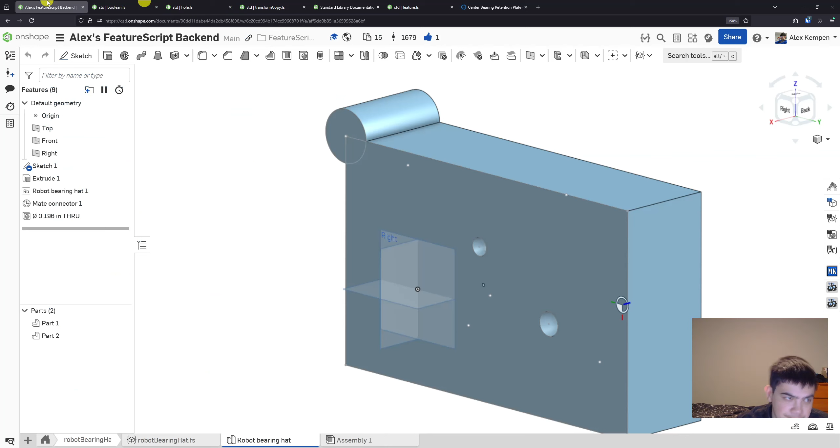So there is an opHole in here. I assume there is. I don't actually know. opHole, create hole attributes. Yeah. Okay. I think I'm just gonna have to roll it myself. So what can I do? Surely they're not getting the feature status though, right? Reporting status? Result.errors. Okay, interesting.

Let's see here. Cut hole result error, and it also does warnings. That's neat. So they have a bunch of error handling there. Doesn't opHole do stuff like this? Which failed to build. If no tools can be built, the operation will fail. Yeah, but there's a bunch of stuff in here that we don't need, like depth and whatnot. Success false. So opHole I know does have fairly good error handling. Otherwise, it might just be process subfeature status. Oh wait, process new body if needed, sorry.

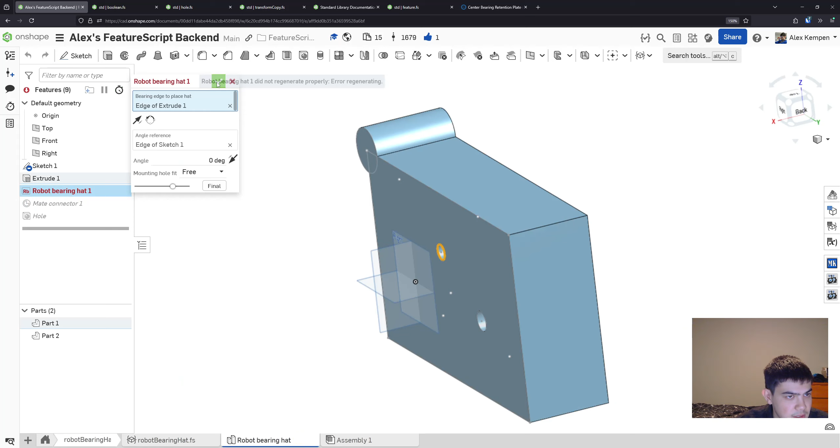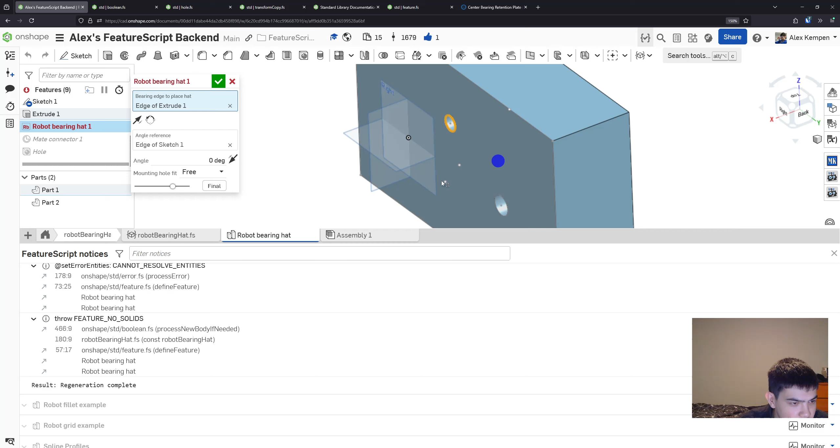Nope, you're not happy. Why aren't you happy? Set error entities? Remove error ID. OP extrude. Throw feature no solids. That's objectively not true. Oh, it's saying it's not finding the solid extrudes. That's weird. Oh, I left my boolean in. Don't want that. Okay. So this is in lieu of the boolean, right? I'll keep it around just for posterity, just for old time's sake.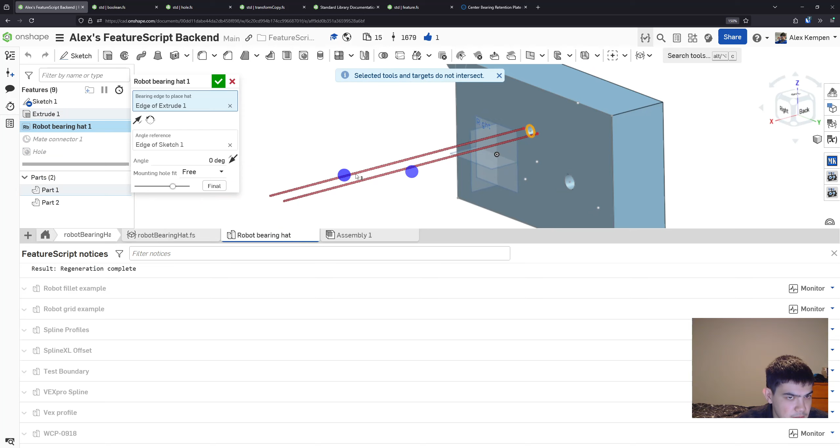But yeah, so ta-da, right? So here, process new body is being run. Do I actually need these then? Hold on, let me slash these out here, and we'll use tool ID. Okay, we don't need those. There's no reason why those should fail, because they're not part of the tools, so I just need to recreate the tools. So we can see our reconstruct op gets run.

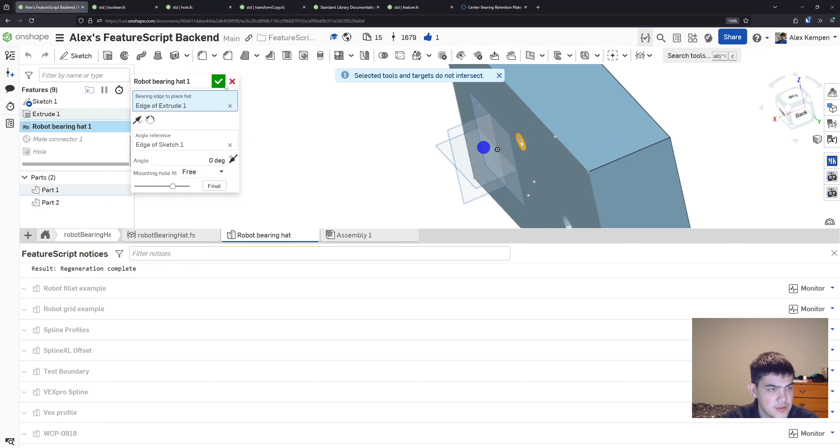Let me verify that. Sometimes you don't actually need that even. Oh, you do need that. Interesting. Okay. So our extrude is being run, and this is capturing that basically. So we can see we're getting our error now, which we're happy about. And I do want to escalate the warning to an error.

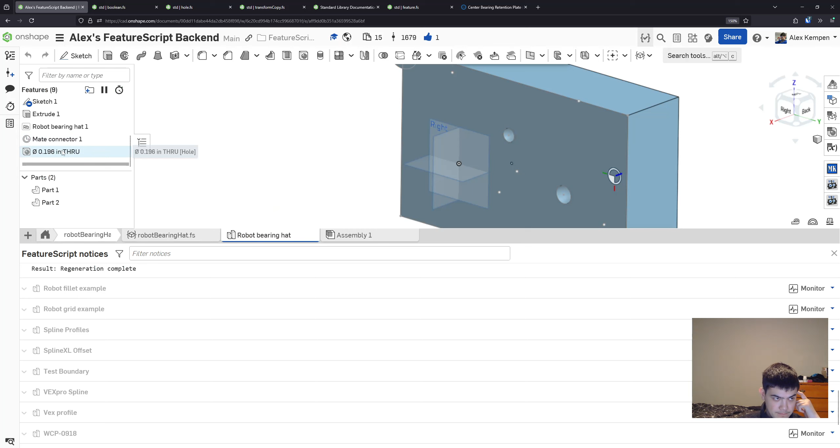Could I just... I guess I could just do it myself as well. Let me try this, I guess. True. And then I'll throw a regen error. That's technically wrong. No, it's okay, it's not unhappy about that. So, okay. How am I doing in my other features?

This is what I get for not programming in a while. I know Pulley has good error handling. Let's go take a look at that. That's flanges. Okay, so I'm just doing it like that. Interesting. Okay.

So this works because the bore is guaranteed to intersect the pulley, because I'm creating the bore and the pulley in the same part. So there's no need to handle that. I could not crash out the feature; I don't have to do that necessarily. Otherwise, I just check the feature status, right? Non-trivial status, ID plus boolean.

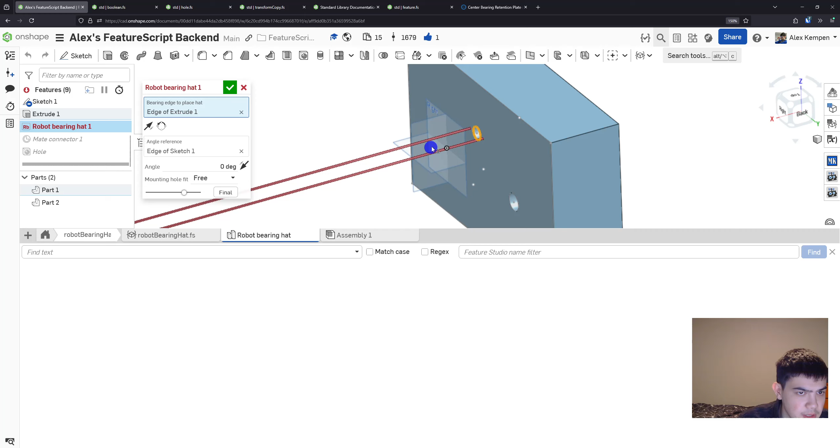And so that produces this output. Yeah, so ta-da! We're happy with that. And maybe, I'm wondering if it would be better to roll up the extrude status into a warning. And then, what are the options again? It's also very late. I don't know. This is definitely just me getting a little lost in error handling as well.

Subfeature error display, additional error display, entities, feature parameter map. Yeah, because that's, wait, is that error string enum? Wait, hold on. Am I just silly? No, error string enum is like a string, so that would be different, that's if you wanted to swap out the message. I don't know. Are there any examples in the standard library of

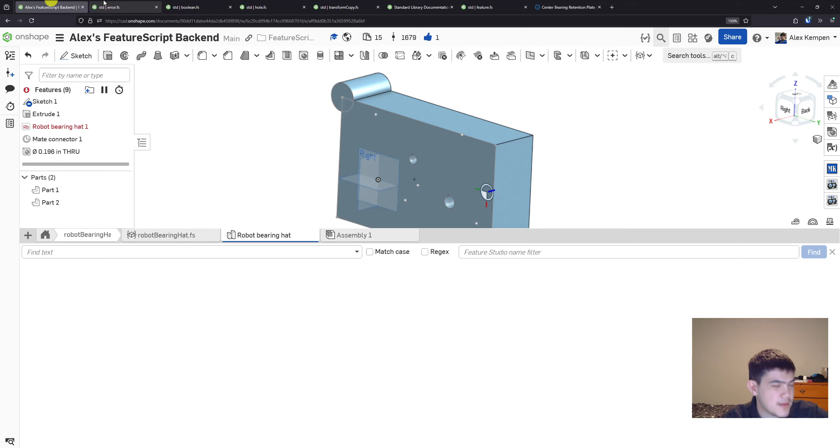I mean, this checks it. Oh, they actually delete them. Interesting. Why do they delete them? Does it change the error display at all? Oh, I guess if they're not crashing the feature, then they won't get rolled back, so you do have to clean them up. Interesting. Yeah. Joinable surface edge, filter overlapping edges. Okay. Yeah, it's really not used very often. Sheet metal done. Okay, that makes me think. Okay, we'll do it like this, I think.

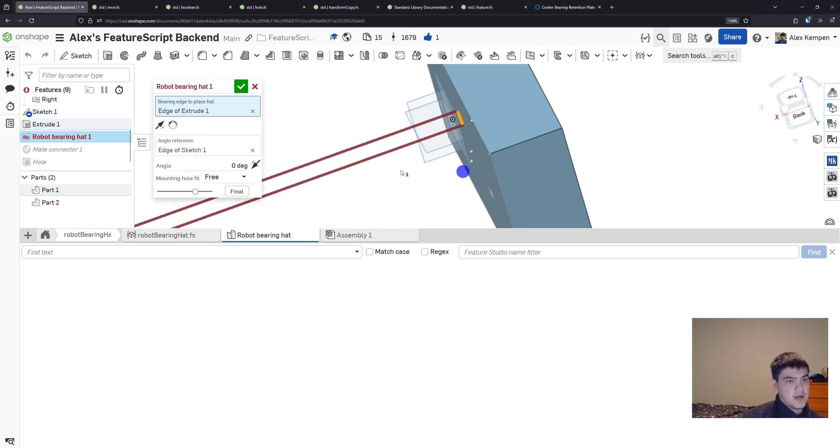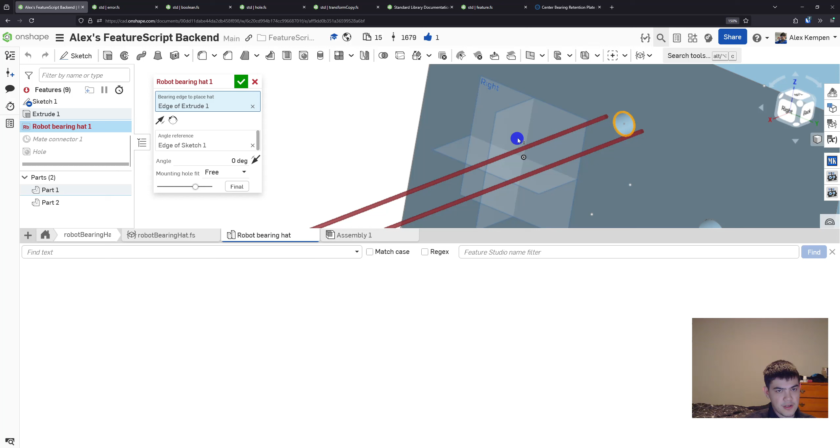Okay, so we'll just throw an error like that, right? Yeah, so when you have an error now, if the tools and targets don't intersect, which is a pretty common error if I had to guess, then you'll get an error and you'll have a nice error display. Cool, so we're very happy with that. And then the last thing to do would be, yeah, so this is a pretty functional feature, right? I mean, it cuts it. You can do all your angle reference shenanigans that you'd possibly want. Everything you could hope and dream of, presumably, right? So we're pretty happy with that.

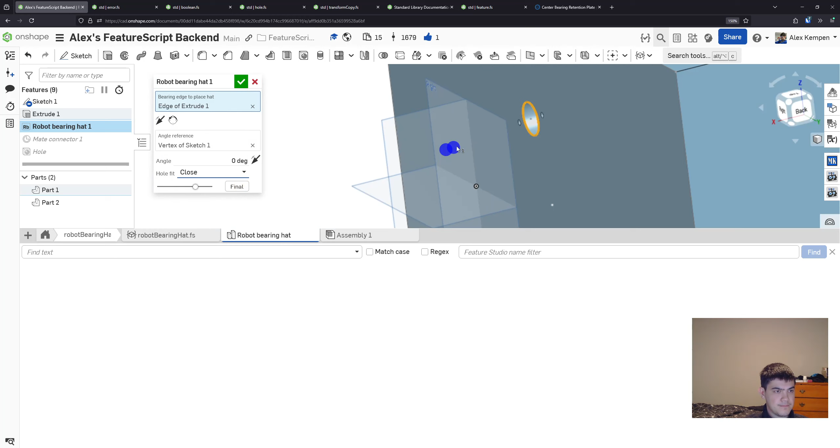So then the only other thing, yeah, you could do your fit. I don't love that. We'll just make it a hole fit. Yeah. And then you can do your fit as well, which is nice. So the only other thing is there's a couple different bearing sizes I want to add, and then if I was even fancier, I could also show the hat as well. That's probably a little overkill though. But yeah, so I want to add a version where you can actually create the hat, like a 3D printed version of the hat if you're not buying one, like a metal version, or making one yourself. And then there's some different hat designs I want to cover as well.

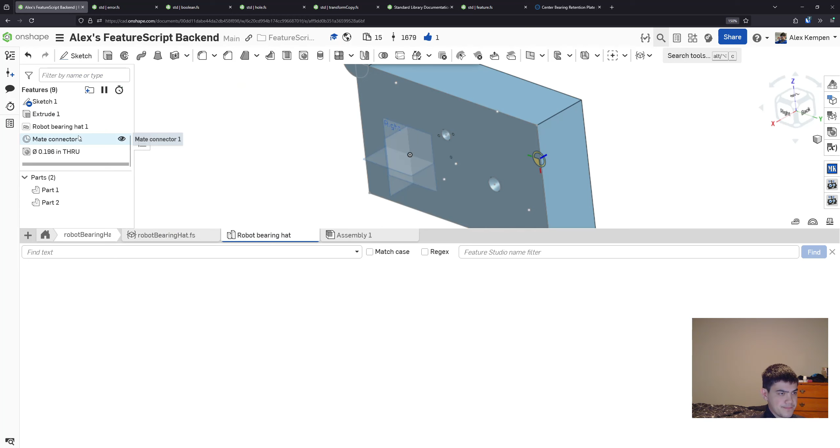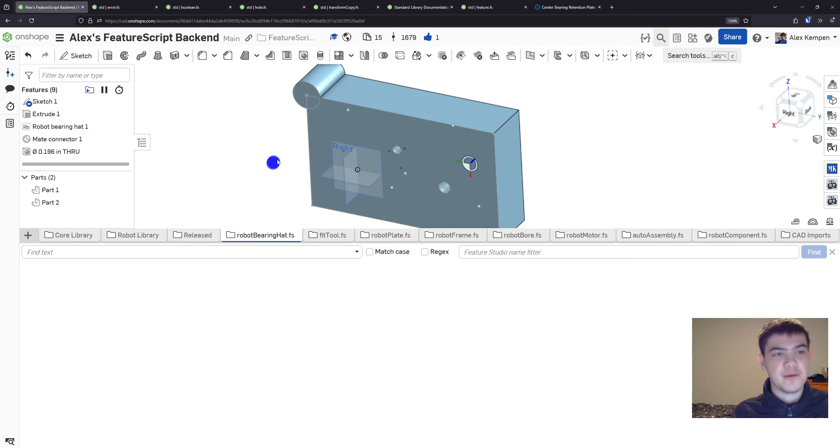And then the other main thing I need to do is manipulators. So generally there should probably be a direction flip manipulator, and then an angle manipulator for your angle. So those would both be probably good to include, if not a touch overkill. But I like to include those frills in my features. I think they are helpful. Yeah, so I'll probably be working on that next time.

So I'm gonna end this here and go to bed. But hopefully this was helpful, and it wasn't just me staring at the documentation and source code trying to figure out how to do error handling and whatnot. I know we got a little lost there. But you can kind of see how I like to go about developing features, and how you can leverage the documentation and the Onshape standard library to help you write features, and work with all the various units and things.